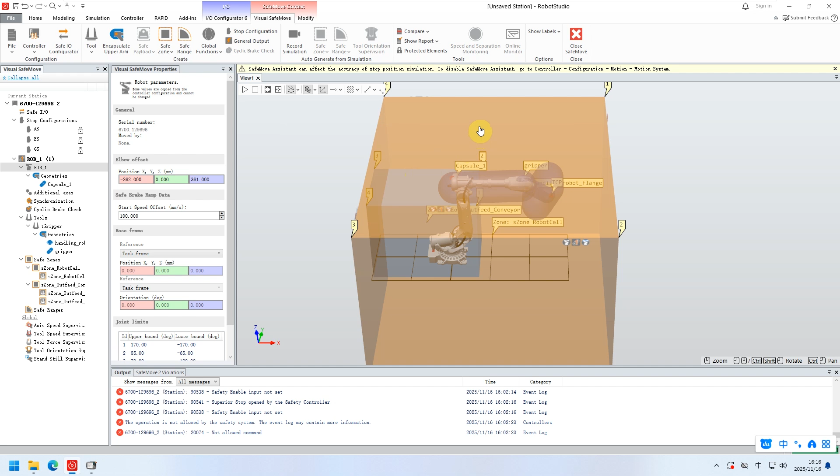In this video, I'm gonna tell you how to configure the SafeMove Pro function in ABB robot. So, for the IRC5 system, you need an additional module, DSQC1015. For the OmniCore system, the controller supports the SafeMove Pro function, so you have to confirm whether the controller supports this function in terms of the OmniCore system. And basically you also need to buy this option from ABB official.

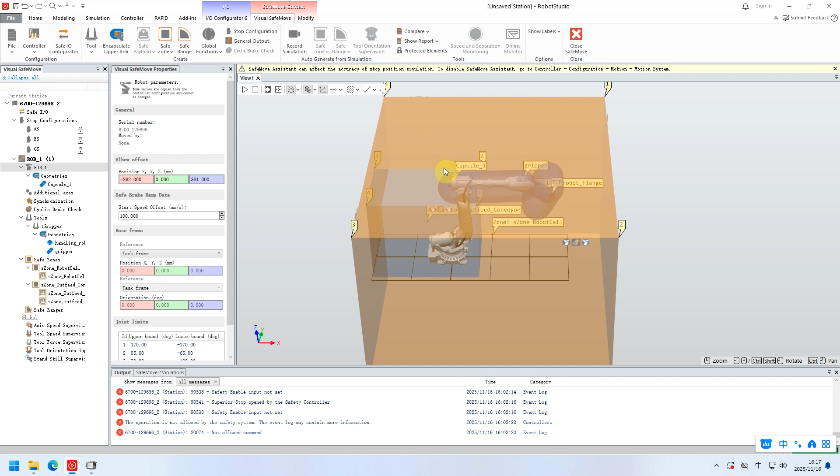In our project typically we use PROFIsafe and SafeMove Pro, these two functions. In previous videos, I already introduced PROFIsafe, so you can combine that video with this video. Remember, in this video, I only focus on the SafeMove Pro function used in my project, not the overall SafeMove Pro function. Let's begin. So first, you have to establish a user group for SafeMove Pro.

Next, you choose Visual SafeMove. As you can see, you have this vertical view. First, you click Robot, and the max speed, manual mode speed, you can define it. This is the default value. You just type the speed based on your project. Next, you click this. As you can see, elbow offset. Typically, this is generated by the robot itself once you connect with the robot. In my current project, I just keep it default. If you want to change it, you can based on your situation, but normally we don't change this value.

For the safe brake ramp data, what does this data mean? It means once the robot initiates the category 1 stop. Category 1 stop means we have deceleration to stop the robot. This function will monitor the category 1 stop. If it doesn't meet the situation, this function will immediately take control of the robot, will take effect.

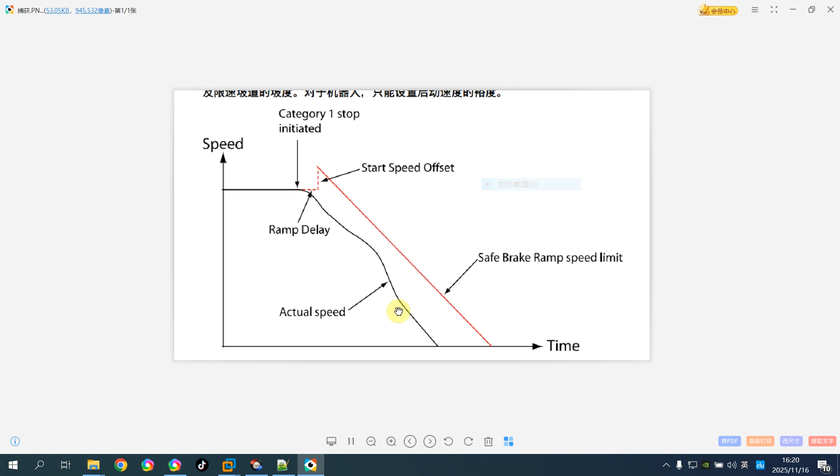Next, for the base frame reference, we have task frame, world, user coordination, robot base frame. Normally, they are all the same, but you can choose task frame. In my project, I choose task frame, but you can choose world or robot base. Basically, they are almost the same. You can change it. And this is the limit for each joint.

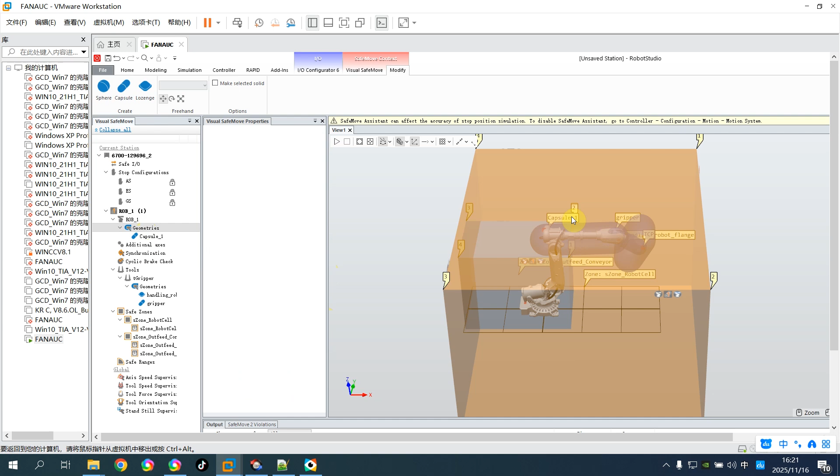So, next, geometries. I'm gonna drag. This is the robot. This is the geometry. Capsule is this one. This is the upper arm capsule. You have to define this capsule. You choose create. There are 3 shapes you can choose. Typically in this project I choose capsule.

What does this mean? This area will be monitored under tool position supervision. This area, capsule 1, is upper arm. As you can see, under the safe zone, include upper arm geometry, which means this area you can define the capsule and it will be monitored by tool position supervision. If the robot upper arm during the work exceeds the defined zone, it will cause an alarm.

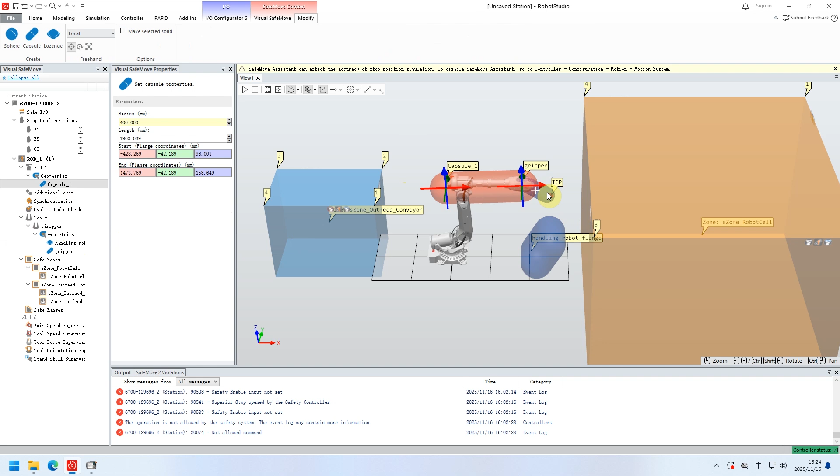So first, you have to create a tool. Basically, if you have the simulation, you already create a tool. So first, you have to create a tool. Second, you have to type your tool data, your tool coordination data here, based on the real project.

And if you have other 3D module, you can install it in the 6th flange. And activation permanent active, you can choose. The data is based on the real project. You type it. And still, you have to create a shape. Still the same area, you define it.

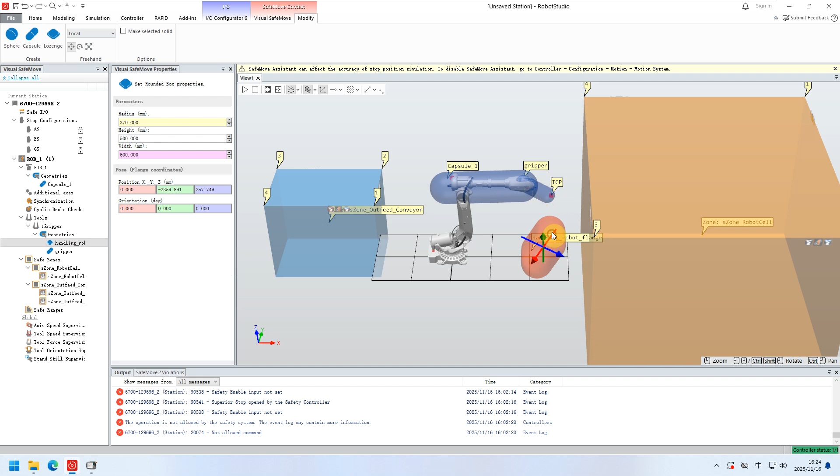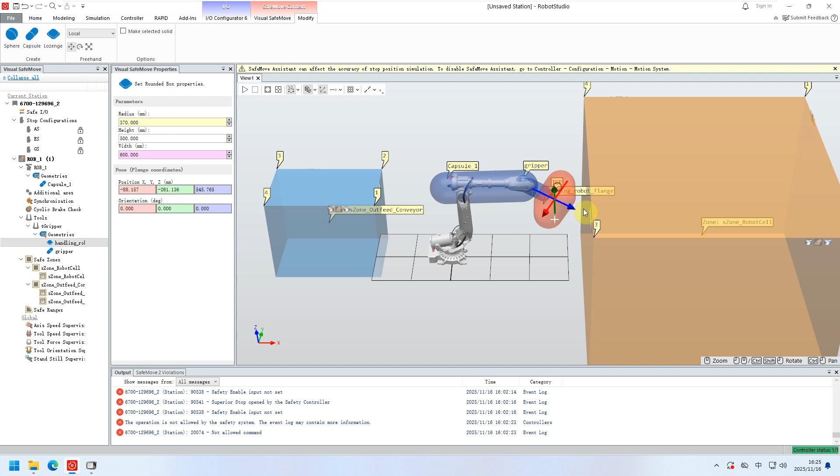Because in this area, I defined 2 shapes, okay, for the TCP, for the tool center. So gripper, handling, okay, as you can see. Also, you can drag, push, as you can see. You can define it, define the position, okay.

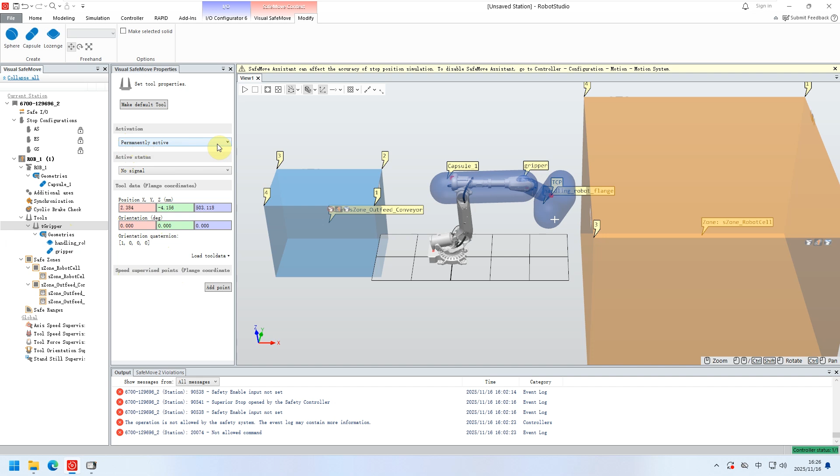And meanwhile, if you need speed supervised points, flange coordinates, which means you can add 8 speed supervised points around TCP to monitor speed. Okay, but in this project I don't add it. I only added this area to monitor the area. Okay, and permanently active.

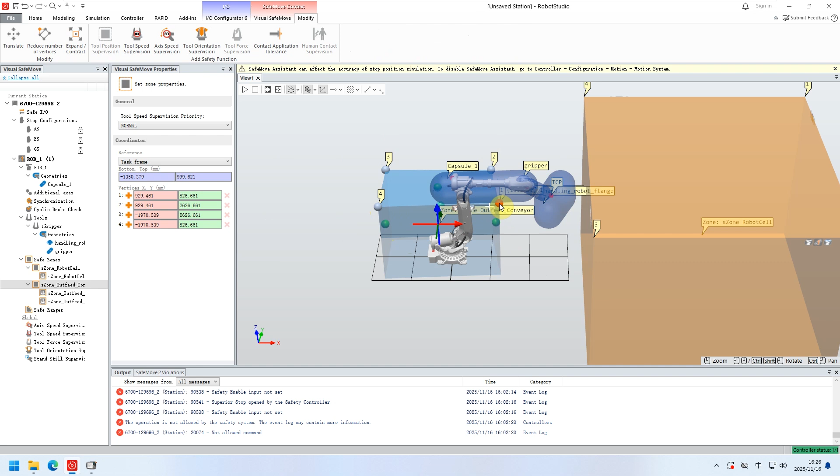The next should be safety zone. Safety zone is easy to understand. As you can see, you can define it. You can define the area by drag. 1, 2, 3, 4, you can drag it based on your situation. Same here, you can drag it. This area also will be monitored under the tool.

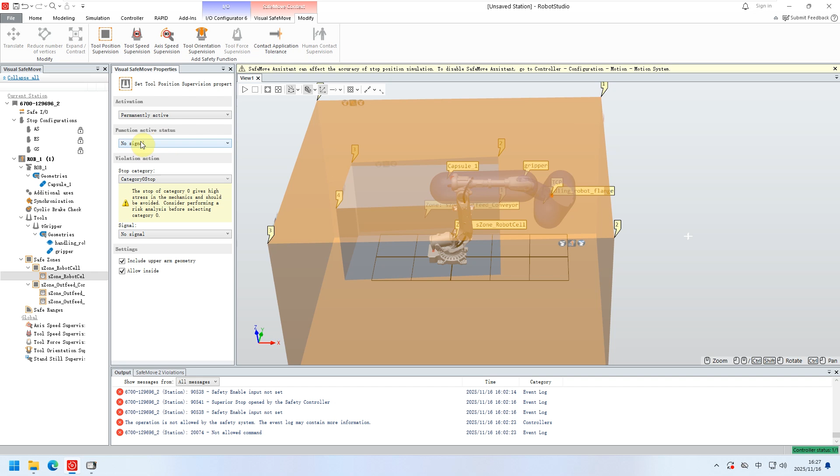You can create first safety zone. You create safety zone, and next you create tool position. As you can see, tool position supervision, or tool speed supervision depends. So in this, I just added tool position supervision property, permanent active. As you can see, you can choose, and you can choose active signals. This means output signals status.

You can choose a signal, and the stop category 1 and category 2, category 0. 0 means stop immediately. 1 has deceleration. Okay, safety zone. And settings include upper arm geometry, allow inside. This is the safety zone. Okay, and the tool position supervision, this is only with SafeMove Pro function.

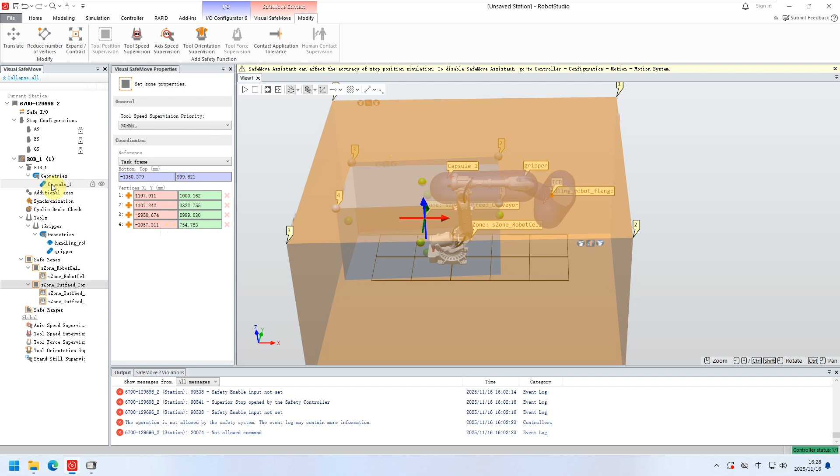Okay, and for the speed supervision priority, you can choose base, normal, override. Basically, we choose normal, and this is the same safe zone, tool position supervision. Okay, so this is the basic areas. First, you have to add geometry for the upper arm, and second, tool, you need to type the tool data and choose the geometry type. This area will be monitored on the tool position supervision.

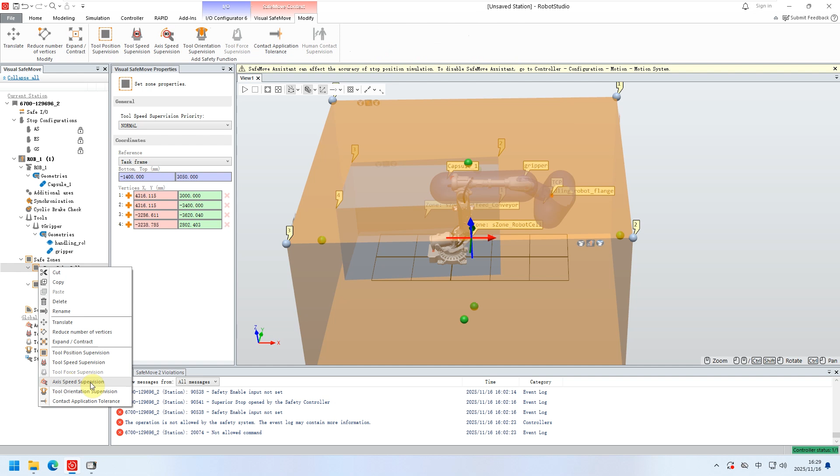And next, you add the safe zone. Safe zone, you can choose different tool position, tool speed, or axis speed, tool orientation. Okay, and for tool position supervision properties, you can choose permanent active, or you can choose a signal to activate. And stop category, you can choose 1 or 0. Okay, this is the basic settings for SafeMove Pro.

And for the SafeIO, I introduced it in the ProfiSafe video. It's almost the same, as you can see, because in the project I also have ProfiSafe function mapping. You can type the signals here, function mapping signals. And for the stop configuration, I also introduced it in the ProfiSafe video.

So from my perspective, the most important basic knowledge for you to master SafeMove Pro under this project: first, you have to create a capsule for the upper arm area. This area will be managed. The second should be tool. You have to create a tool, type the tool data and define the area.

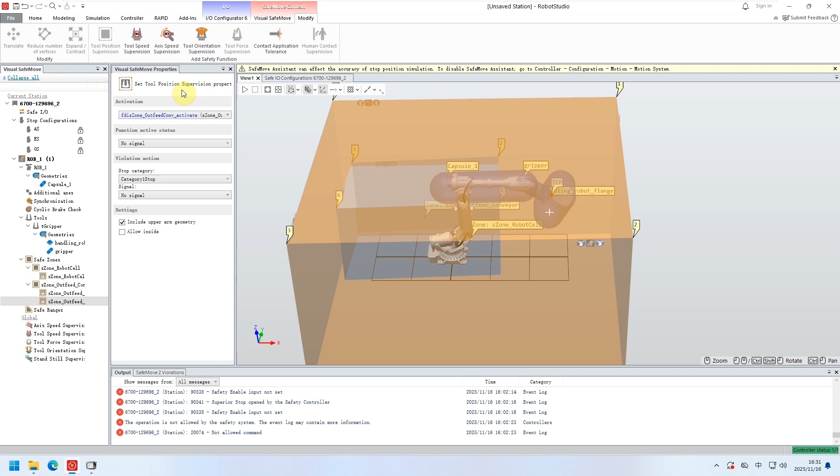The next should be safe zone. Safe zone, you can choose tool position supervision. Remember, this is under SafeMove Pro. So the last should be SafeIO. You define it. Okay, so this is this video's content. You can combine it with the ProfiSafe videos.